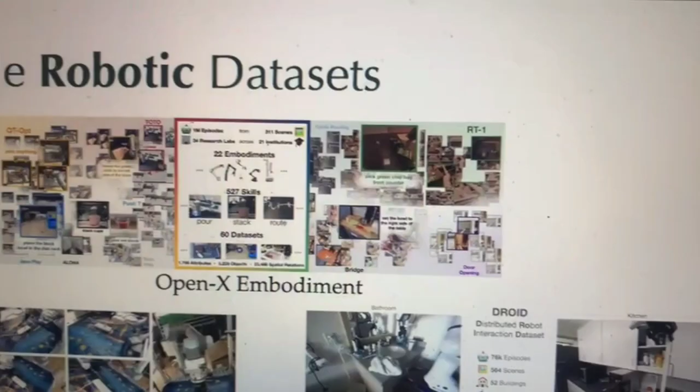We have started generating large-scale robotic datasets as well. There's been a lot of recent exciting progress in this topic, and we have OpenX Embodiment, we have RT-1, and DROID, which are datasets where we try to cover a lot of robot morphologies, a lot of different tasks we want robots to do, and a lot of different scenes with a lot of different objects.

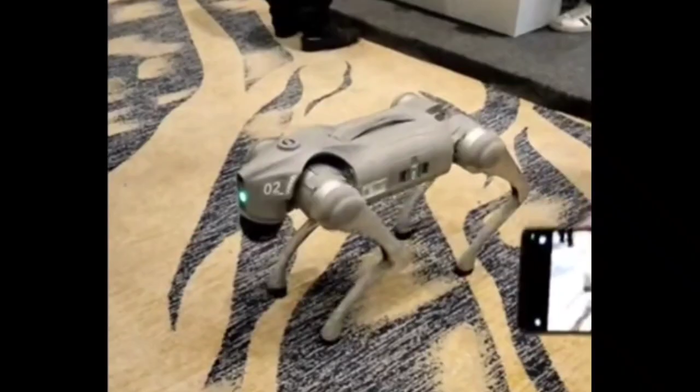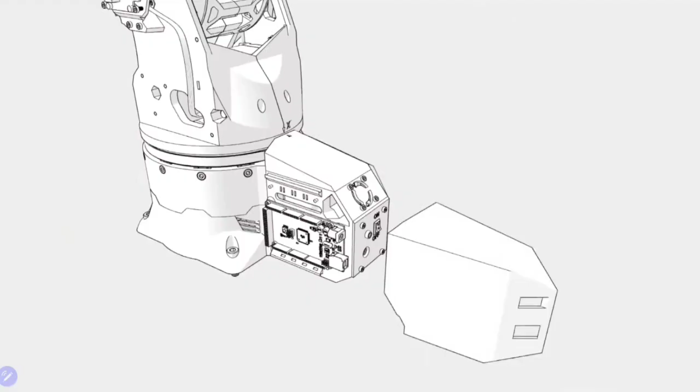Now the question is, is this enough data? Have we solved robotics in some sense? And one thing that is important to note here is that all of the datasets that we've seen thus far are collected by humans. So every single trajectory that you see in the dataset was collected. So the defining theme in this talk is going to be, can we get robots to learn and interact with their environment with minimal amount of human supervision?

And that's a lot of words again, but really all I want is I want to let my robot fiddle with the environment, leave it unattended. I can go play, I can go swim or whatever. And I just want the robots to learn by themselves with me not being there.

FBRL is the algorithm I described earlier, which is a forward-backward RL algorithm, and simply the backward policy is trying to reset to the initial state distribution.

Okay, so how do we fix this? Obviously, I'm not the first one to think of this problem. People have worked on this, and there's a very intuitive solution. It's roughly in the regime of forward-backward RL. The idea is that in addition to learning a policy that solves the task, you also want to learn a backward policy that allows you to retry the task, and you can interleave those policies back and forth so that you can keep trying the task again and again.

To minimize human intervention, we should proactively request an intervention. So instead of a human trying to find that the robot has failed, we should try to request an intervention when the robot fails autonomously. This would minimize the number of interventions. And that's all I'm going to say about this—there's a lot more I'm happy to talk about later.

The algorithm is... but it's usually just easier to see what happens in the real world. So this is a very simple task where we're trying to hang a cloth on a hook, and the forward policy is going to try, and it successfully did the hook thing, and the backward policy is going to reset the cloth so that the forward policy can try again, and it will go through this process several times. Really that's the key idea—you want to be able to try the task again.

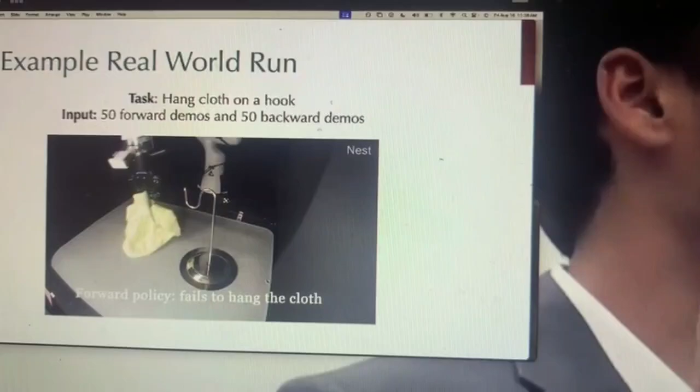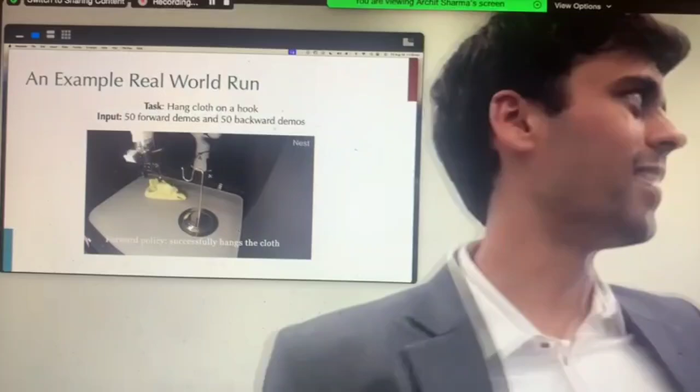So in this scenario, it's actually not able to do the task anymore. It has failed to grasp, and because it failed to grasp, the backward policy doesn't have much to do. Now the forward policy is going to try again, and it failed to complete the task. So the backward policy will actually reset the task for the forward policy to try again, and it will now successfully hang the cloth. So this is really what you want.